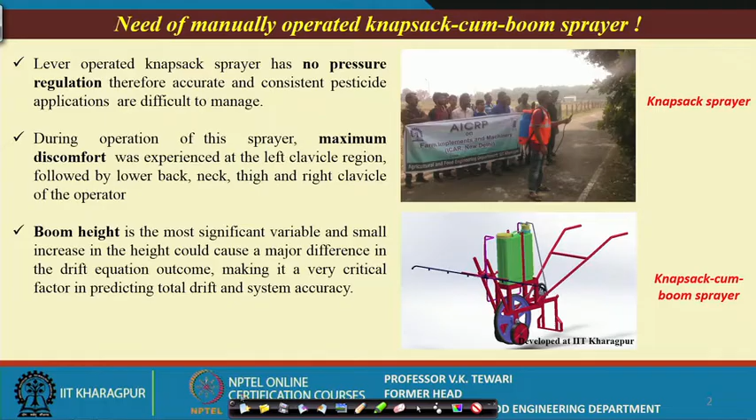What are the design considerations? You can see here the different crops have medium height, I mean the height of the crop should be 10 to 80 centimeters, it varies depending on the crop, and different row spacing.

These are some of the agronomical requirements for a particular crop. Now it should be easy to pull, simple in design, durable - these are certain things one would like to have. From an agronomical point of view, it must fit the row-to-row spacing and the height of the plant, so your design should allow you to operate above the plant.

Then physical and economic considerations - it should be low cost material. These are the minimum requirements we think, and maintenance should be low.

Now, functional requirements - what is this? This is very important. We have the hand operated lever sprayer, the knapsack type. Now the developed pressure should be in this range, because this is what we get, about 1.5 to 2.5 kg per centimeter square, the pressure we maintain in the knapsack type. So we have to maintain that much pressure, and the nozzles we have taken is 8 nozzles.

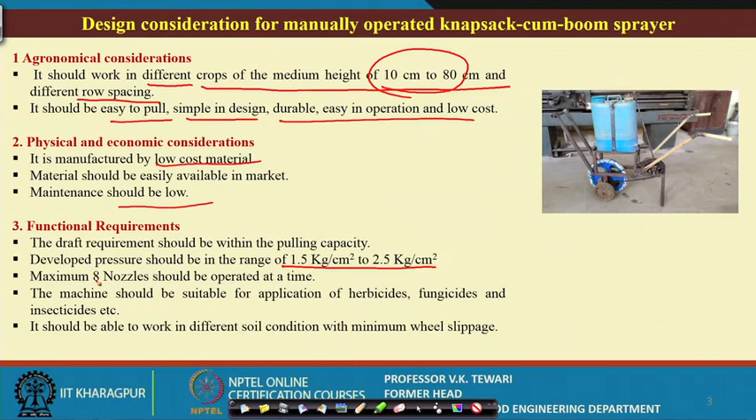As I told you, we are slightly ambitious and wanted an 8 nozzle spread boom that can be pulled. Once you are able to walk inside the crop, I think with the same power of the man we can do 8 times the work. This is what we thought, and we have been able to do this, but how do we achieve this part? This is one thing which is very important.

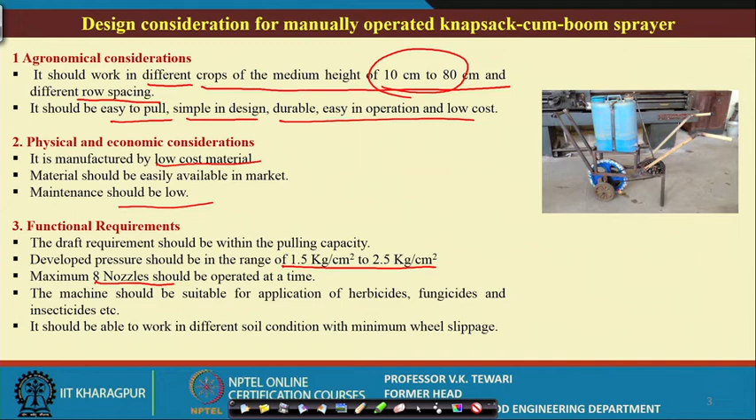So what we did is, instead of the rotary action available from the rotor, we converted it into reciprocating action, and for that we have used a 4-bar linkage arrangement - a 4-bar linkage mechanism.

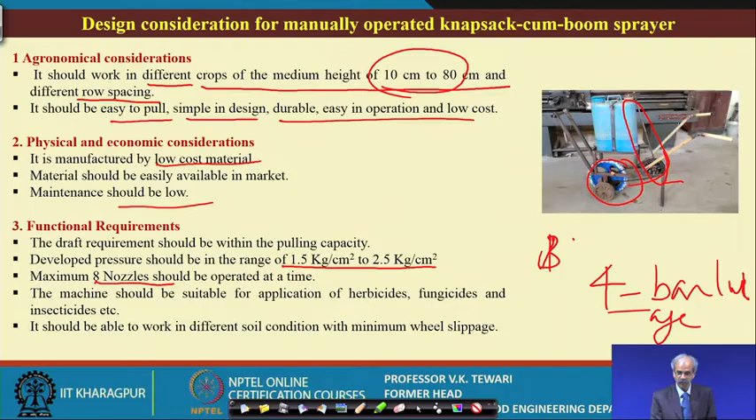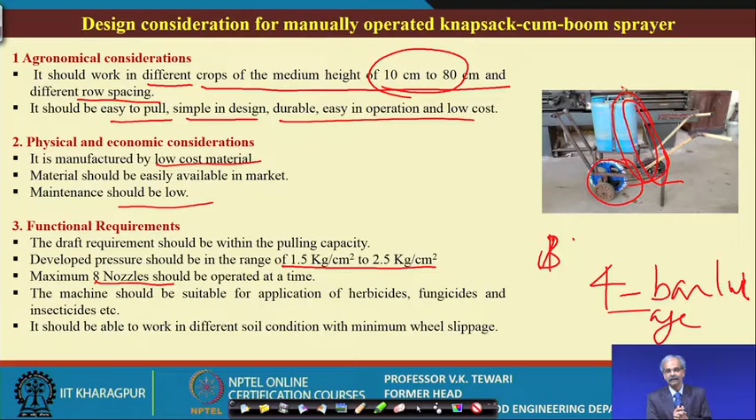A four bar linkage mechanism has been used here, and the rotary power which we have got from the operation is converted into the reciprocating motion which is done by the hand. You may say it will depend on the speed at which the person moves. Sure, it will depend on that, but the pump remains the same.

We have used the same tank which the person uses for his knapsack type sprayer, so the same pump has been used. What the man was doing by carrying it is now carried on a small frame which is made here, with a handle. The handle can be adjusted and the person can push this wherever he wants, and the rotary motion is converted into reciprocating motion of the lever, maintaining a pressure throughout. So, by using the four bar linkage mechanism, this has been achieved.

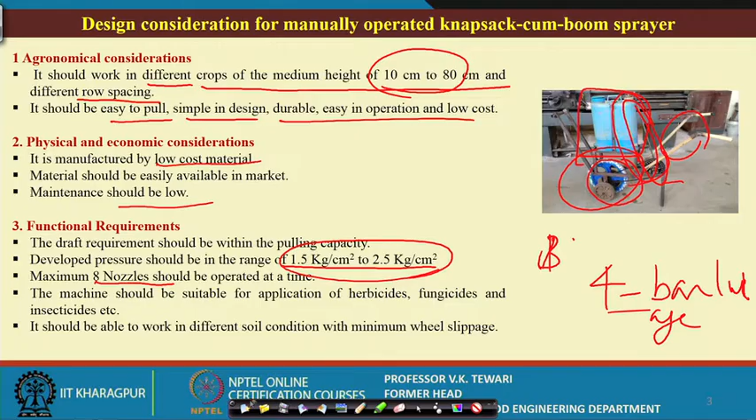So, these are some of the details of the one which we have done here. You can see the chemical tank, about 15 liter capacity. As I said, this is the one which is available already, so we do not have to do anything.

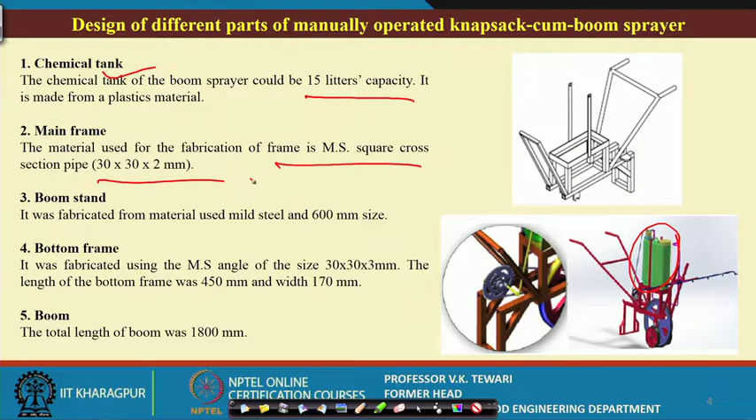Then the main frame, a frame has been created so that we can keep the tank over there, and then this tank can be transported. So, for transportation of that tank, we have the wheel over here.

Then the boom stand for creating the boom, because if you are talking of 8 nozzles, there is a spacing of the nozzles, and it is not good to carry that width. So, we have made it in such a way that it can be folded into the same plane and taken inside, and once you go inside the field you can spread it over.

So, the frame has been created, and the total boom length is about 1800 millimeters. This length is enough to cover that much of swath, whereas in the earlier case swath was not possible. You have only one nozzle and the swath is not more than about 40-50 centimeters, or 400 millimeters.

At the same time, the person has to have all this carried on him. So, this is the beauty of this particular device, what we are calling a knapsack-cum-boom sprayer, which we have developed at IIT Kharagpur, and it is worth showing you. This is good for small fields and small farmers, and also a cheaper device.

Now, you can see here the sprocket with which we have made the rotary arrangement and converted it to a reciprocating arrangement, which has been shown.

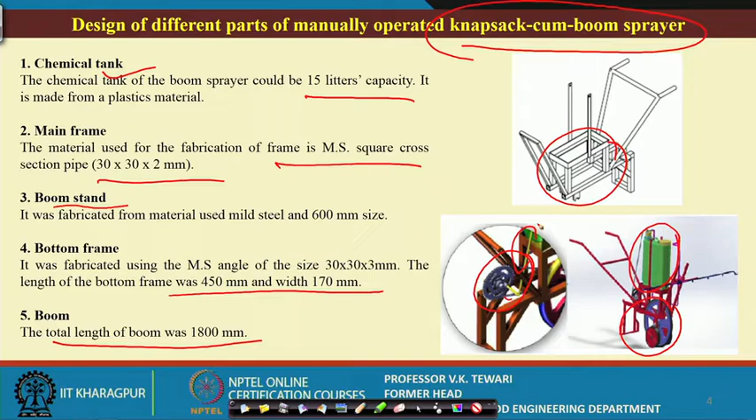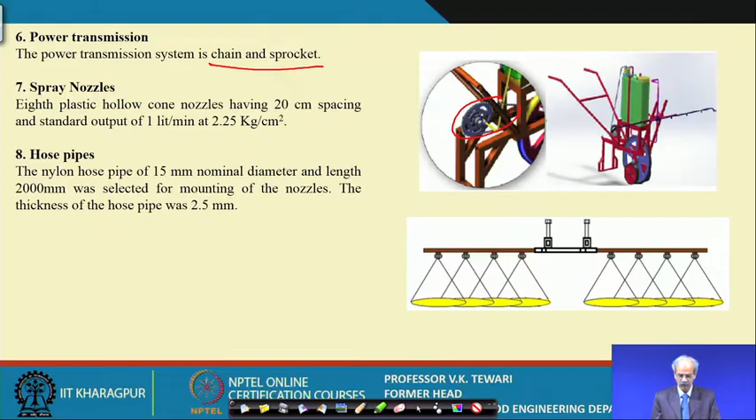We had to think of how this chain and sprocket arrangement could be utilized for giving a constant pressure and constant rotation of movement of the lever, because when the person operates with the hand, a similar effect has to be achieved in this case also, and we have been in a position to attempt that.

There is a small stand also we have made, so that when it is there, it can stand on that, since it is only one wheel. That arrangement has been made.

Then this particular handle has been designed ergonomically, so that persons of different heights can be accommodated, because you will hold the handle here. So, you have to know the height of the person, what changes if a tall person is there, if a shorter person is there. Accordingly there has to be a change in the inclination of this handle.

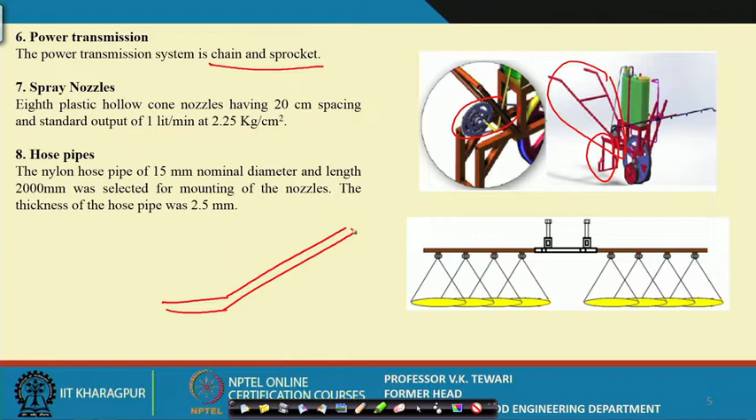So, the handle can be changed, let me show you. This is one location, it could be another location, could be something like this, maybe another location could be this.

So, depending upon the requirement, these things can be changed. So, these can be changed, the handle can be changed here, the handle can be changed here. This is another thing which has been incorporated in this.

So, from ergonomics and from human consideration point of view, we have considered several things. One is that we have reduced the fatigue or reduced the total load on the man which was carried at the back. Second, the person does not have to operate this with both the hands. So, you can see how strenuous the task is.

We have removed that, and while in a standing posture, he can just push the tank which is there on a frame, and it is easier to push that through the system, because there is a wheel. So, once it is on a wheel, it is easier to push, and the system will work, because power we have taken from the wheel.

The spray nozzle spacing is 20 centimeter, and the spray nozzles are put 20 centimeter apart. The output we are getting is this, at a pressure of 2.25 kg per centimeter square. So, this has been tested in fact. Well, you might have certain questions. We have given an overlap of about 30% or so, as you can see from here, a certain percent of overlap is given here.

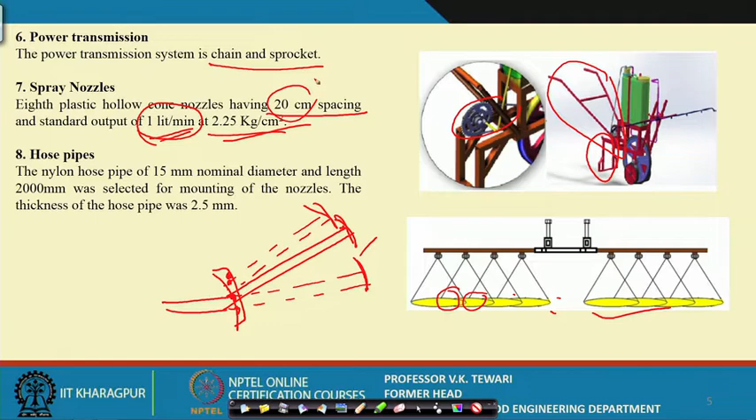And hose pipes are used, 15 millimeter diameter, and length is 2000 millimeter, selected for mounting of the nozzles. So, these are details of how you select these nozzles, how you keep them. In fact, initial hiccups could be there; this is the first prototype, in fact it is a laboratory prototype, we can say.

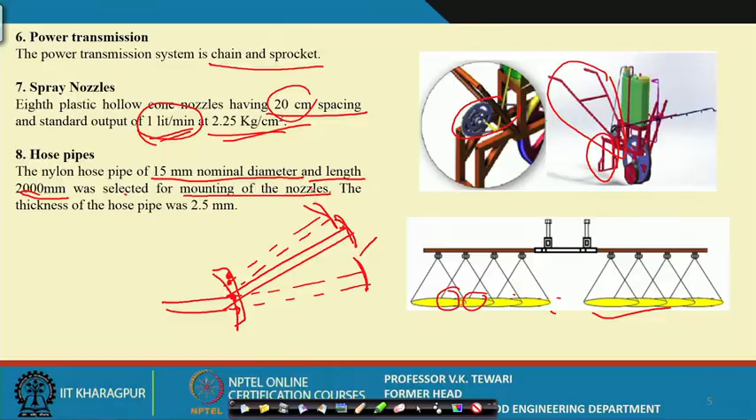So, we are working into more details of making it a field prototype machine, so that we can rigorously test it under actual field conditions in different crops. So, the preliminary information which we have, we would like to show you. Well, this is what it is. You can have a look at this, this is the AutoCAD diagram, and this is the actual unit here.

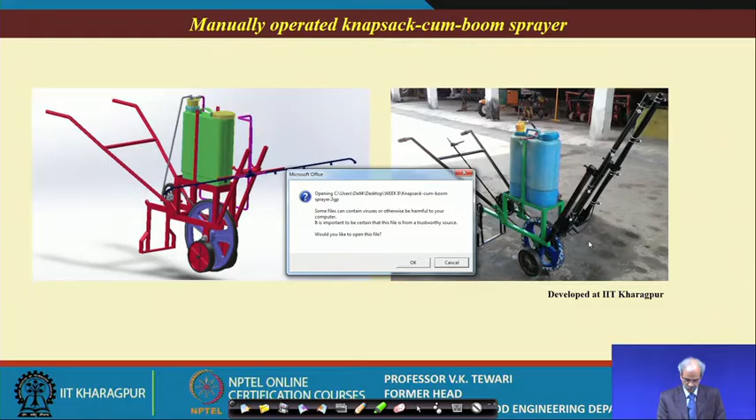Now, if I show you here the laboratory testing, you can see the person is simply pushing this, and from all the 4 here and all the 4 on this side, there is a discharge taking place. You may question that this discharge is reducing as it goes on that side. Yes, we have tested this, and we are trying to optimize it.

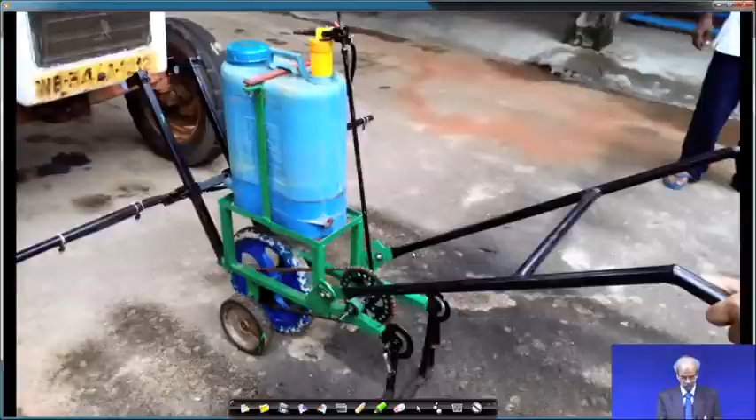Now, you can see how much area, about 1800 mm, so about 1.8 meter swath you can cover, and it is very easy for the person to cover this. You can have a look at the second. So, this is the system which works. It is a laboratory model, a laboratory fabricated device which needs to be tested rigorously under laboratory as well as field conditions

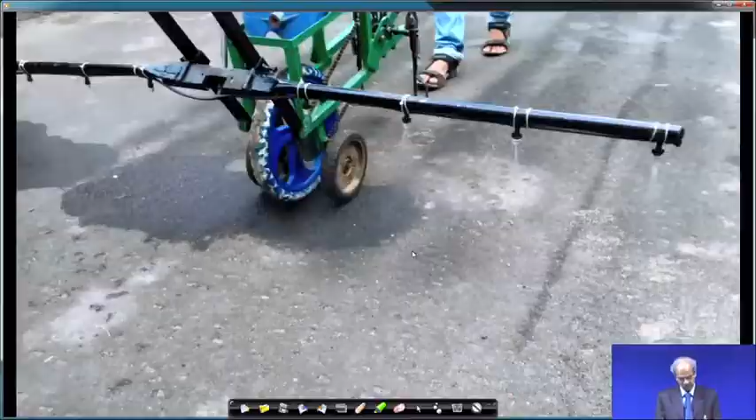with the different nozzles. Actually several nozzles have been used in this case. Depending upon whether it is solid cone or hollow cone or fan spray nozzles, various things are there, but each nozzle needs to be tested. So, various things are required.

For example, we need to test with the different types of nozzles, different spacings of the nozzles, and then the pressures we are getting, and the speed at which we are getting that pressure, and that will help us in operation of this, because you can see the same tank has been used.

So, you can say a slight innovation for a small device, for small plots it can be used. The height can be elevated depending upon at what stage of the crop you are applying. So, this can be lifted.

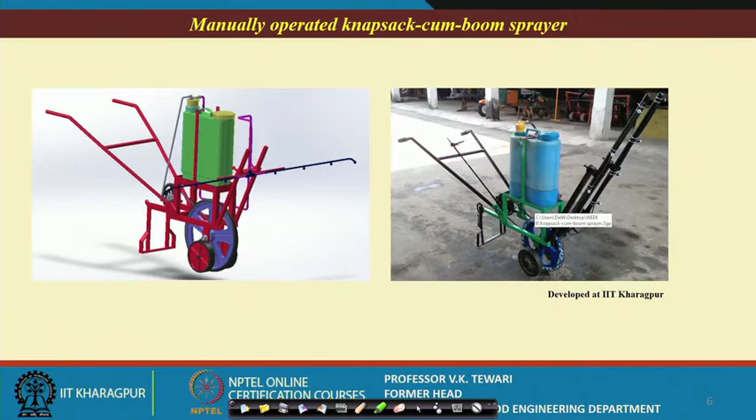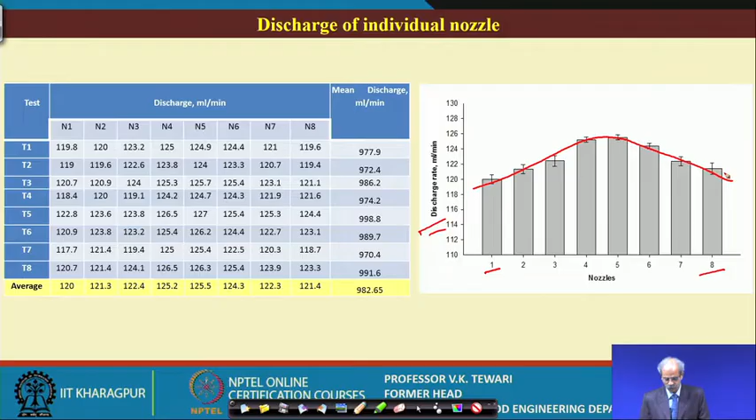Now, what are the details of this particular device and how much is the discharge that we get? We had tested under various conditions. As I told you, if you want a particular nozzle tested, just have a look at this: the nozzles are here from 1 to 8. Now, here you can see the discharge which we are getting is something like this. So that means we are not getting uniform discharge.

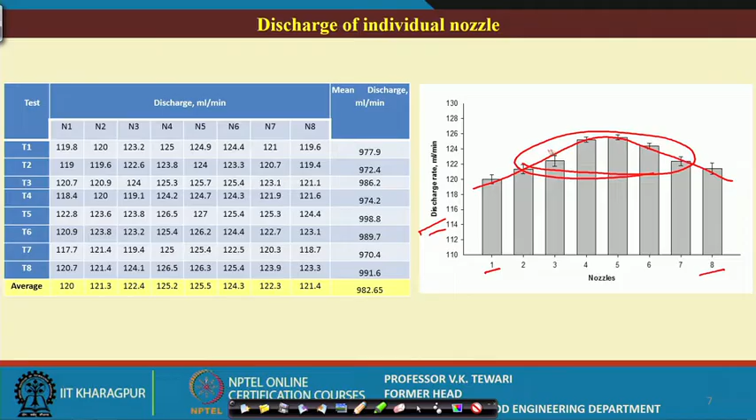So, our claim that we have virtually replaced what we are doing is not fully acceptable, to the extent that there was only one nozzle, and here there are 8 nozzles. But if you check, you can say that this area could be said to be covered. So, this is the length that you are in a position to cover. You may not be in a position to cover this one here. So, effectively you can say very comfortably that this is the area which can be covered with the discharge

we have got. Now, another thing which has not been mentioned here, I would like to tell you, is the speed at which the person moves. There are certain problems when the person is in the field, depending upon which crop. If you are talking of wider row crops or orchard crops, where these are at certain distance, then it is easier for the person to carry this.

But if you are talking of cereal crops, where it is very difficult, then you have to consider what stage it is at and how much is the spacing in that crop, or maybe we have to shorten the distance between the two transport wheels which are connected with the 4-bar linkage mechanism for designing the operation of the lever. So, we need to look into this design and which crop we are talking about. There are certain aspects which need to be done.

So, if we go back to the discharge values, the mean discharge, you see here that there are various tests we did. Have a look at these tests. There is not a single mention of the speed, but say the speed of operation is about 1.5 to 2 km per hour. Depending upon 1.5 to 2 km per hour, this information needs to be further investigated. Now, let us have a look at this data.

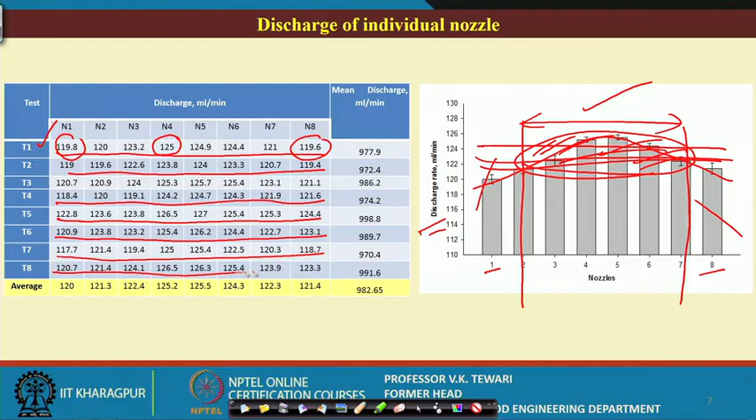You can see another test. More or less, in each of the tests you can see the variation here, and another one, this is the variation here. Each of these from 122.8 to 124.4. Now, mean values, then I have T6, this is T7, but mind you, these are all tests at laboratory level.

We are not talking of the field level at this point of time. So, the average that you get from N1 is about 120, and this is about 121 or so, and roughly you can get in the centers those. This is what I wanted to show you here. So, the mean discharge from each one of these in milliliter per minute, you can get these values which we have got.

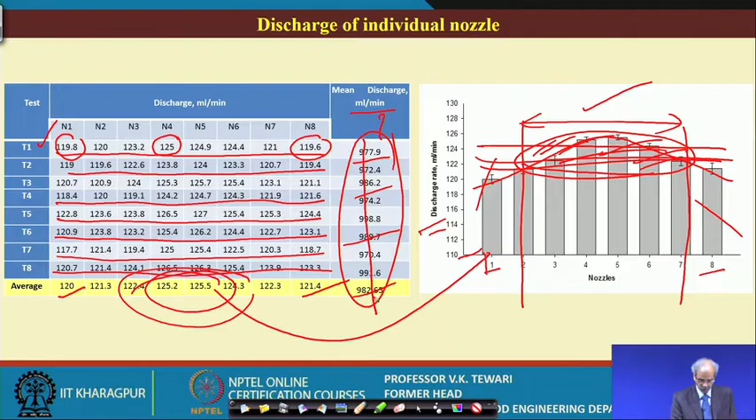So, I think this needs to be looked into. I think we may cancel this. This is the discharge which we can think of. So, the preliminary testing of this, the beauty of this device I can again emphasize is that we are employing the same person and increasing his capacity by the knowledge that you have about the 4-bar linkage mechanism, which can be used for converting the rotary power to a reciprocating one and get this thing done.

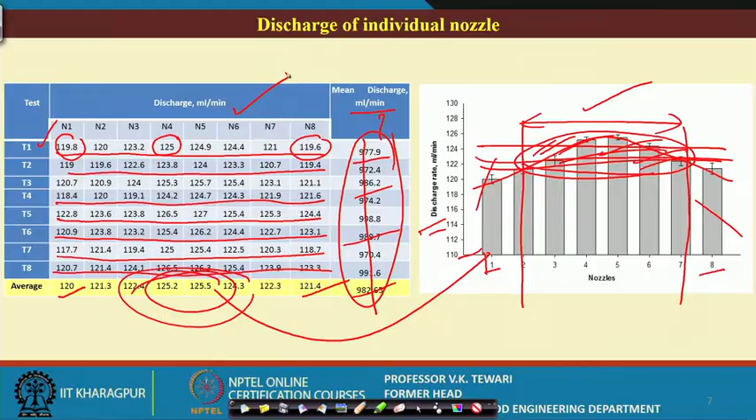So, more and more testing of this unit is required under field conditions before we can say that yes, this machine is good. The comparison between knapsack sprayer and developed manually operated knapsack-cum-boom sprayer. Now, what is the comparison?

Well, it is worth comparing here, because as I said, in the knapsack type no ergonomic consideration has been thought of, but that is the first consideration which has to be done. The person is very comfortable in this operation; the person is not comfortable in that operation, because both the hands are in action, he is walking, he is carrying that load. So, there is hardly any comparison so far as the comfort and safety of the person is concerned.

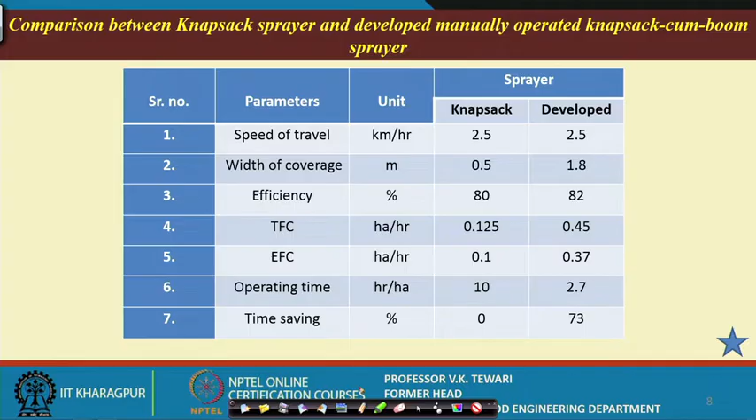So, apart from that, if you compare the other part of it, the speed of travel in kilometer per hour is about 2.5 and 2.5. I wonder whether we can achieve 2.5 or not, or maybe 3, depending upon the type and condition of the crop. If the crop is at a tender stage, maybe 3 weeks, 4 weeks or so, it is possible. But when the crop has gone more than 6 weeks, 8 weeks, and we need to spray for control of insect pests throughout, then it is okay.

Now, the drawback one can think of is that since we are spraying everywhere, we cannot control it; it will come out at all locations, or we might have to plug these nozzles wherever we do not require, and it cannot be used that way. We have to think of how it can be used for a spot location. So, in a spot, if you require, how do we do this part? That is one thing which is still a question mark for this particular device.

And width of coverage is high here. Yes, so we have a high width of coverage. Efficiency in both the systems is more or less the same. Hectare per hour, you can see you get a very high one, 0.37, then operating time about 2.7 hours per hectare. This is very good. And time saving: in fact, you save 73% of the time. And what is not mentioned, as I said, is the ergonomic considerations which the designer must think of for such devices.